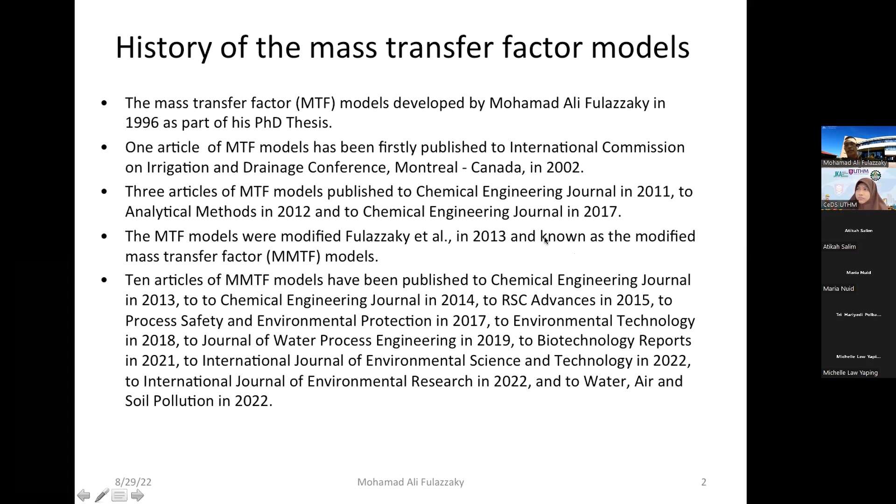Then we look at the development of the MTF model. The model is developed based on Fick's law of mass transfer. You can see here we have liquid, then the film zone, then the pores, and then fixation. Mass transfer passes through three successive steps. The first is what we call film mass transfer, from bulk water to the film zone. This is because we have a driving force, the difference between C and C*.

Then pore diffusion. Pore diffusion is within the pore; the solute moves within the pore. And the third step is fixation, here, adsorbing onto the active site. Because fixation is very fast, we consider that adsorption is controlled by either film mass transfer, or external mass transfer, or pore diffusion, or internal mass transfer. Only these two steps are important to consider when we adsorb something from the liquid to the solid phase.

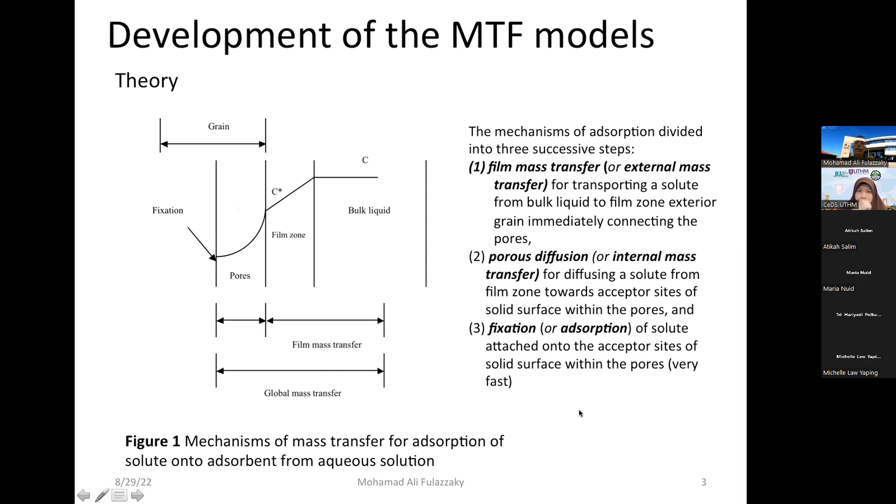And then you can see here how we develop the model.

First, please consider the continuous equation. The equation is written to set up a specific case. There are 2 cases: the first is at the level of elementary volume in case of continuous medium, and the second is at the level of system or part of system in different conditions of functioning. Our case is case 2, not 1.

And then we can look regarding the microscopic balance, which is to develop the balance of elementary volume, dx, dy, and dz in space using the equation of diffusion according to Fick's law. This is very difficult to develop. We should have very strong mathematics to develop this, because how dx, dy, dz move up, down, pass through and go back and so on is very difficult.

And then to simplify that, we use the macroscopic balance. Macroscopic balance is to write the general equation of mass transfer interfacial gas-liquid, or in our case, liquid-solid, to the level of system or part of system for different functional conditions.

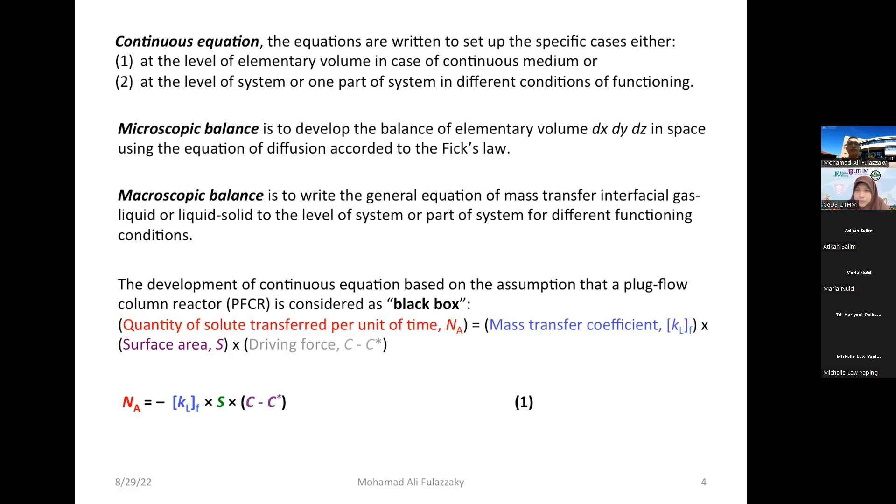Okay, and then look here, the model of flowing, the schematic of flow model, C and CS. And this C and C different, like that.

And then we can develop the model of mass balance: entrance equal departure plus absorbed. And then absorbed, we can define it by this, and then we can develop this model, and by some assumption, we have the model like that.

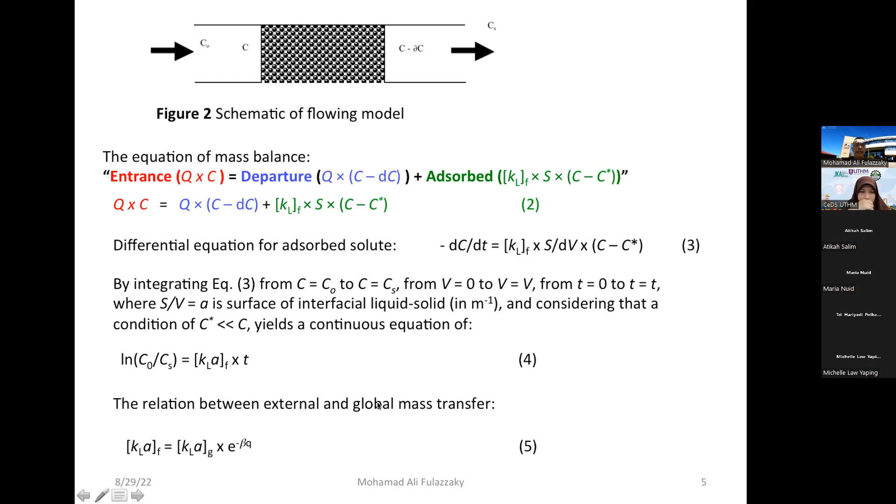And then we have the correlation between film mass transfer or external mass transfer and global mass transfer like that. And then we can write the equation like that. This is what we call the mass transfer factor model, or you can say the Fulazzaky equation, up to you.

To simplify that, we need to write it in the form of a linear equation. In linear equation, Q equals B, blah blah blah. And then B defined as this, blah blah blah.

And then you have a relationship between global, external film, and internal pore diffusion, like that.

So this equation, look here, before modified we write Q, but after modified, ln Q. This modified is an empirical equation because I didn't develop it theoretically, but only used the real data, and then we plot ln Q versus ln T, and we have a very, very good correlation for the model.

And this applicability of the model can be expanded, because when we replace Q with ln Q, and then ln Q versus ln T, we trace the curves.

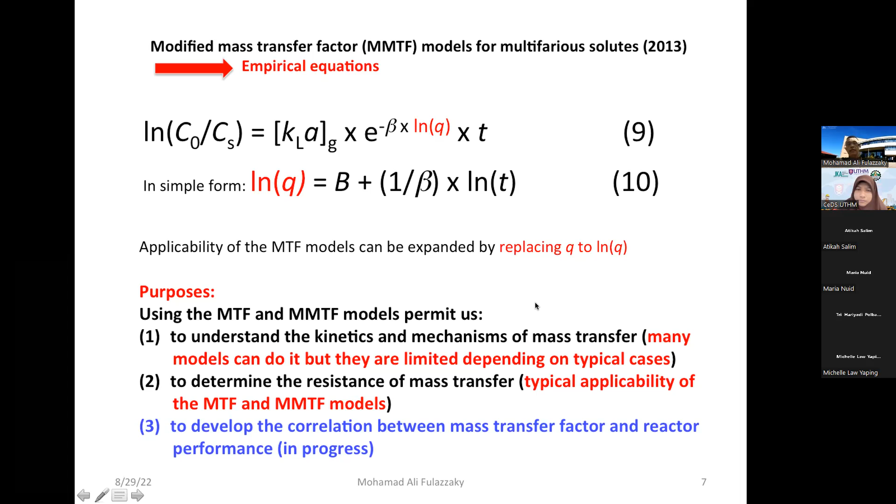Not like with Udin by using fungi, but this is in the reactors. I think we will be successful with that.

The basic knowledge of MTF and MMTF model - we can see here the difference between the two models. If we look at the nature and year of development, MTF is a theoretical equation developed in 1996, and MMTF model is an empirical model developed in 2013.

When we look at the curve plotting, for MTF model we plot Q versus ln T. But for MMTF model, we plot ln Q versus ln T.

The application of the MTF model is just applicable for single solute - it is a specific case, only for single solute. But for the MMTF model, we can use it for wastewater, river water, well water, and so on, because they contain multifarious solutes in water. So we can use that - this is the wide application of the model.

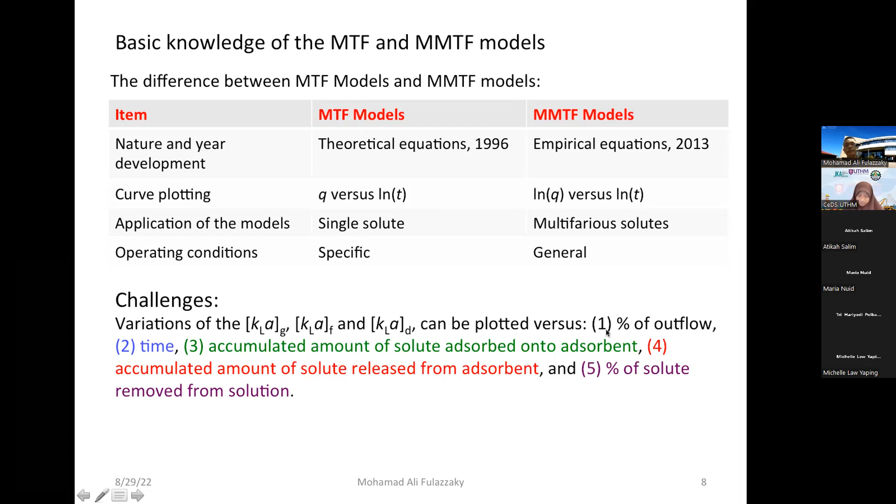And we can see also this model can be applied for many types of reactors. For example, here batch reactor for precipitation, we can use this. Sequencing batch reactor in case of Maria uses the sequencing batch reactor. Incubation reactor - the case of the paper I wrote with Udin - uses incubator reactor.

And also you can use hydrodynamic column, plug-flow column reactors like the case of Atikah, Hairul, and packed-bed column reactor in the case of Shakila. It's many reactors we can use.

Other reactors you can use also, but the principle is you should have accumulated amount over time. This is the key thing you should remember in your mind - you should have accumulated amount of solutes over time.

The use of MTF and MMTF models could be useful to study the mechanism and kinetic of adsorption, biosorption, desorption, precipitation, decolorization. But I don't have a case regarding the desorption. Maybe you can use this for your research - then you will have good novelty for that, because we haven't explained the case of desorption with this model.

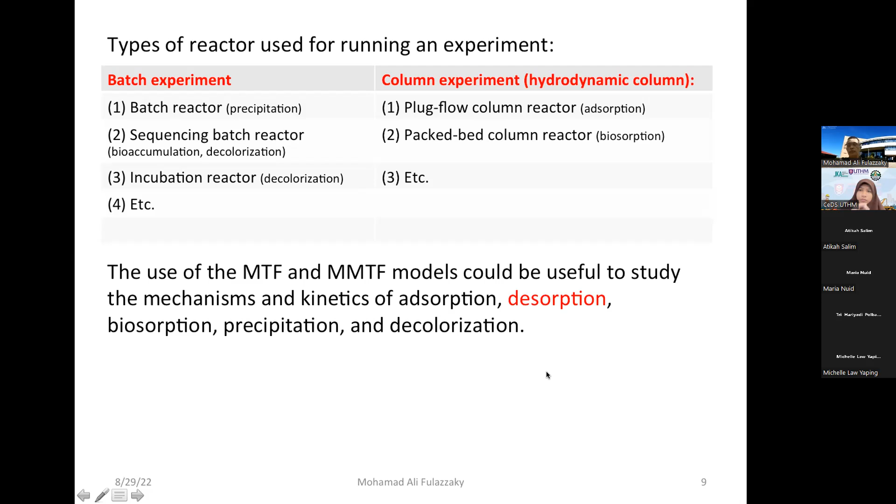If you see the implementation of MTF and MMTF model for different reactors - for example hydrodynamic reactors, we have published 6 articles this year; packed-bed reactor, 1 article this year; sequencing batch reactor, we have published 3 articles; batch reactor, 1 article this year; and incubation reactors, 1 article. These are some statistics you have.

What we want to tell you is that the interest of readers for this model is more than other of my publications, because citation of this model is higher compared with other publications.

These some articles we have published are all published in Q1. More in Q1, but we have also published Q2 and Q3 in WOS, about 5%. Maybe in Scopus almost all Q1, but only 2 in Q2. That means this model is very interesting if you want to publish your article using this model, because we have published in high quality journals - it's Q1 recorded in WOS, that means it's a very good journal.

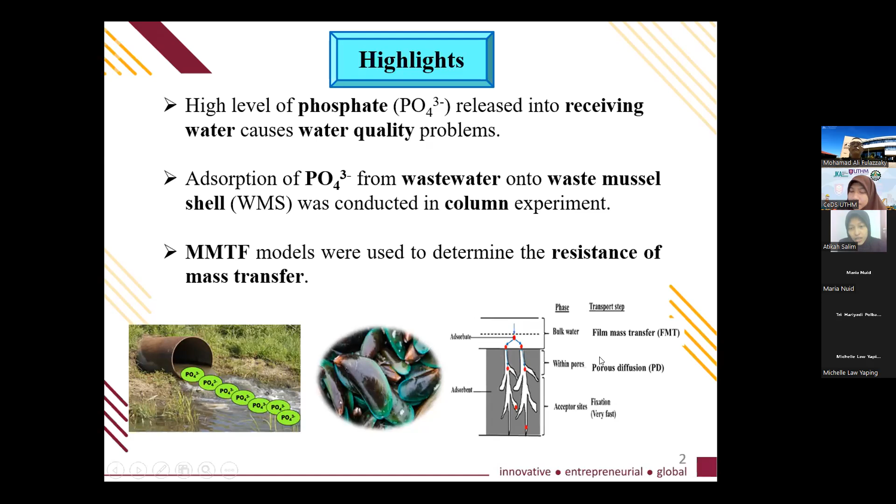In this work, the adsorption of phosphate from wastewater onto waste mussel shell was conducted in a column experiment. The MMTF models were used to determine the resistance of mass transfer, which is dependent on either film mass transfer, FMT, or pore diffusion, PD.

The results verified that the efficiency of phosphate removal from wastewater by the hybrid plug flow column reactor, HPFCR, reached 96%. The phosphate concentration of 0.26 milligrams per liter was detected in the treated wastewater, which can convincingly meet the international effluent standard.

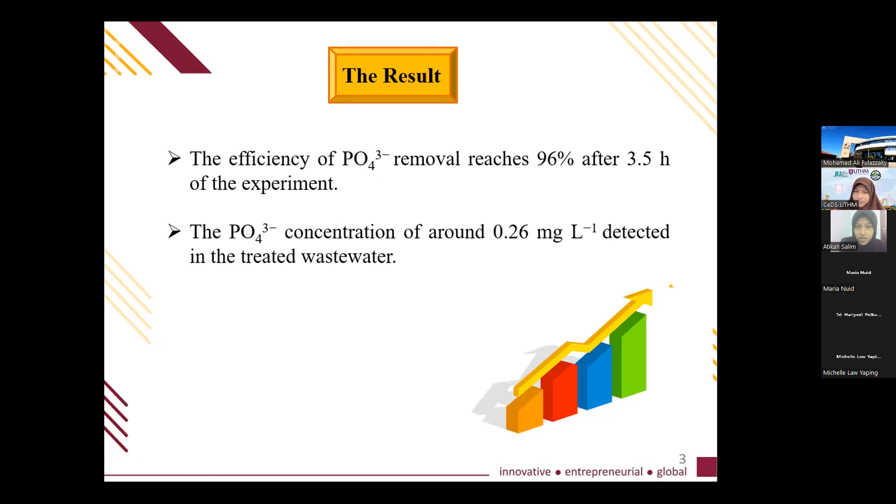Based on the curves in Figure 8B and 8C, the values of KLF and KLD against phosphate breakthrough can be used to determine the resistance of mass transfer, which is dependent on film mass transfer or pore diffusion. KLF is the film mass transfer, FMT, factor, while KLD is the pore diffusion, PD, factor.

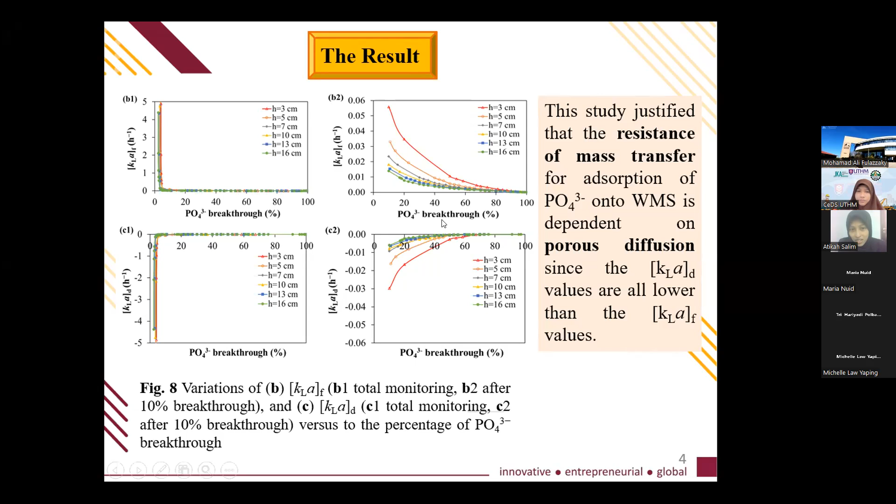The KLD values shown in Figure 8C2 are all lower than the KLF values shown in Figure 8B2, with increasing phosphate breakthrough. Therefore, this study justified that the resistance of mass transfer for adsorption of phosphate onto waste mussel shell is dependent on pore diffusion.

In the future, the MMTF models can be used to describe the adsorption of phosphate from wastewater or contaminated water by various natural materials such as egg, oyster, cockle, and crab shells.

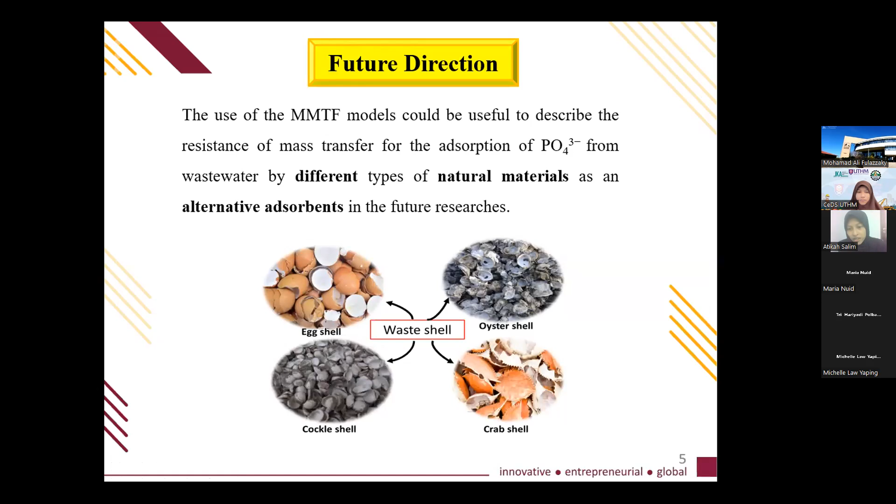This study produced the waste mussel shell (WMS) adsorbent and the hybrid plug flow column reactor (HPFCR) treatment system for removing phosphate. One article with impact factor 2.984 and 2 book chapters. We hope that this HPFCR treatment system can be expanded towards real applications to help improve water quality, especially for our people, our community, our state, and our country.

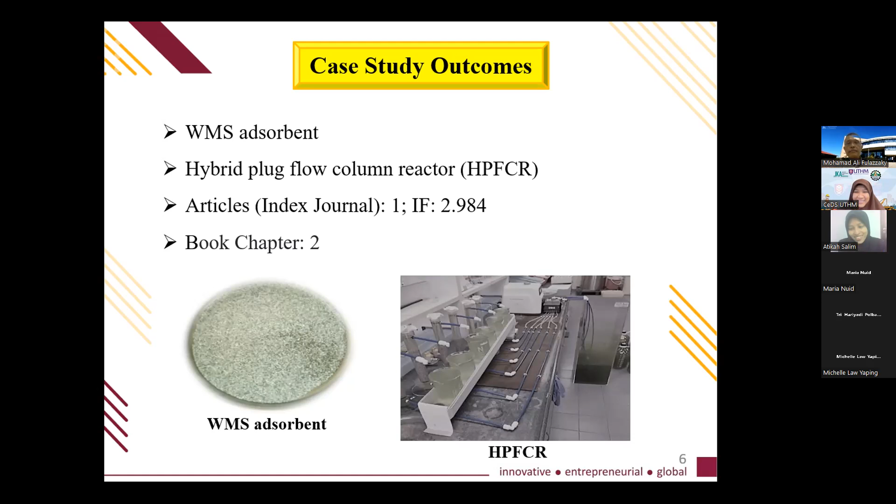Ladies and gentlemen, in 2022, Prof. Ali and Dr. Atikah have published 3 manuscripts regarding this application of modeling. Is it correct, Dr. Atikah? This year?

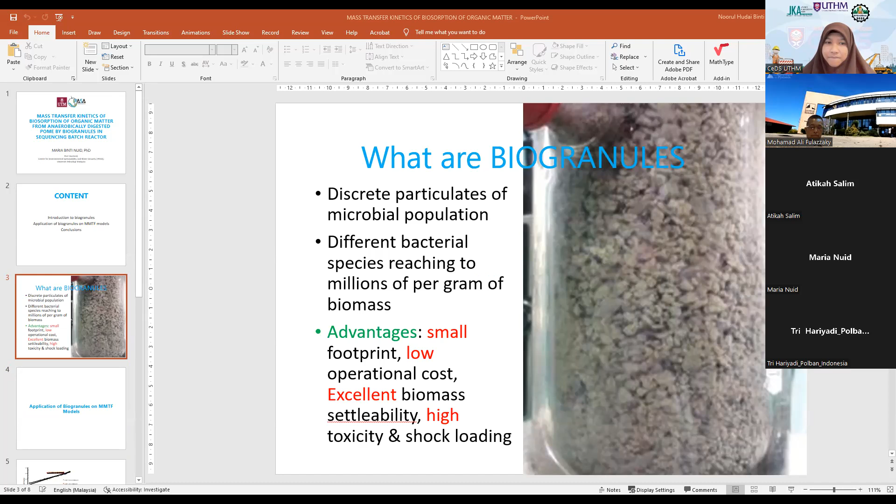Why use the MMTF model? The purpose of this study was to use the MMTF model to assess the biosorption behavior of organic matter, or total and soluble COD, from the anaerobically digested POME before and after the addition of Serratia marcescens SA30, or SMSA30, strain into the biogranule system. The aim is to understand the wide applicability of this model and thus provide valuable insight into the biomass accumulation and biogranulation process.

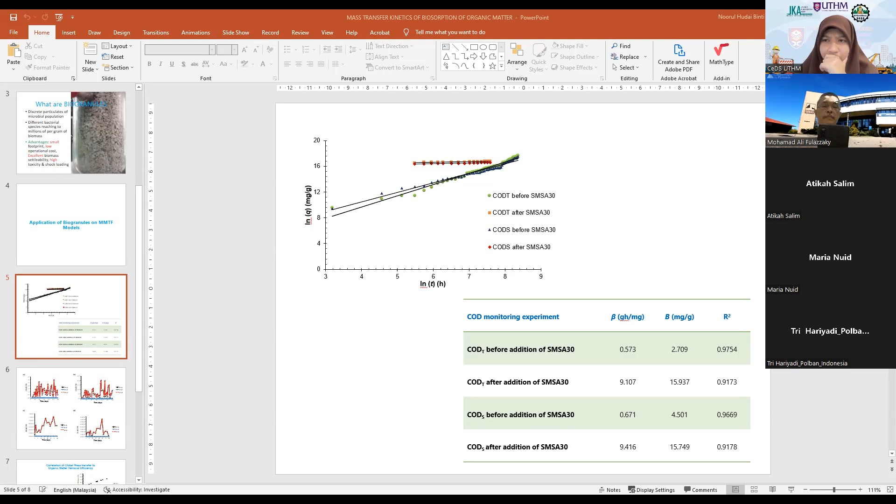This indicates that the parameters β and B can be used to describe the kinetics and mechanism of the total and soluble COD. From the graph, the values of B and β increased after the addition of SMSA30 strain into the biogranular system. Next.

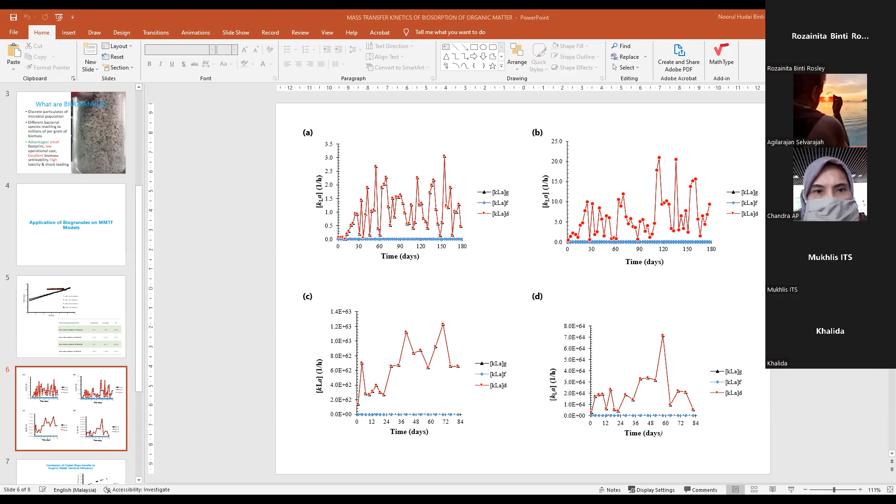The result indicates that the resistance of mass transfer is actually dependent on and controlled by the external mass transfer, represented by KLaF for transport of substrate from the bulk water to extracellular polymeric substances. For EMT, when a liquid flows through a biogranule, there exists a region near the biogranule surface where the liquid velocity is very low, giving rise to a near-stagnant film of liquid, which is of maximum resistance to transfer of substrate to the biogranule surface.

Okay, next, the figure shows the correlation of global mass transfer to organic matter removal efficiency. This graph shows that the performance of the biogranule system actually increases logarithmically with increasing global mass transfer rate.

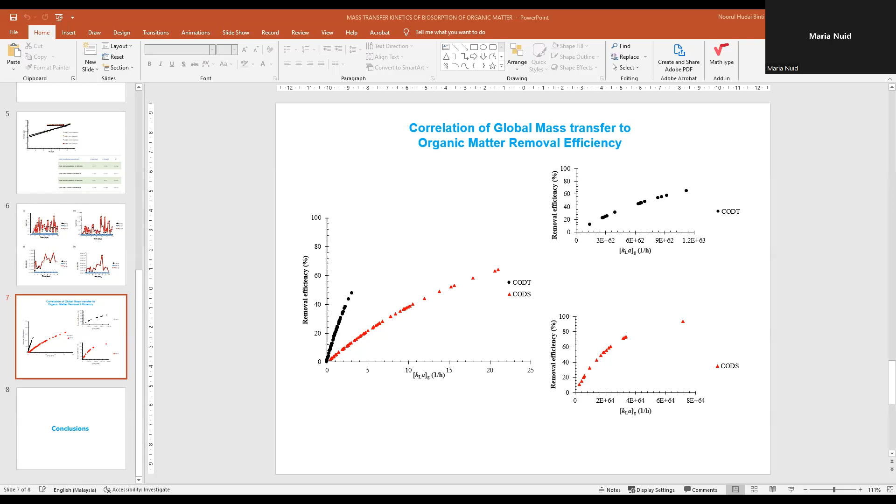Next, the last is the conclusion from my study. The result of the MMTF model actually shows that the total and soluble COD biosorption by biogranule in the SBR system is controlled by resistance of external mass transfer, EMT. And also, this study verified that the removal performance of the biogranular system treatment increases when the GMT, global mass transfer rate, increases.

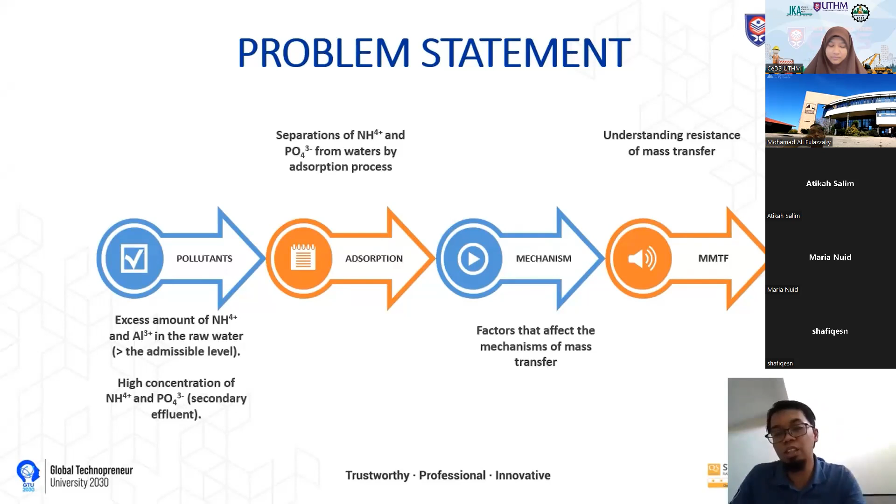Okay, the objectives in this case study. The first is to hypothesize and develop the modified mass transfer model, as I mentioned previously. The first mass transfer model applies to the single solute, but in this study, we try to use multiple, or various, solutes in the water. And then the second objective is to justify.

Okay, to justify the validation of the developed modified mass transfer factor to determine the kinetic and adsorption, and verify the application of the empirical model and the modified mass transfer factor model. But in this session, I just want to share about the mass transfer model, the adsorption kinetic and the other empirical models.

Maybe all of you can contact me if you want further information or knowledge about the kinetic isotherm of the other models. But in this session, we just focus on the mass transfer factor model. Okay.

Okay, this is the setup, the experimental setup for the first objective of the study. In this study case, we conduct it to understand, or to develop, the modified mass transfer factor model. This is the description of the reactor we set up: it consists of the column, peristaltic pump, and then a certain water storage, and then here is the main characteristic.

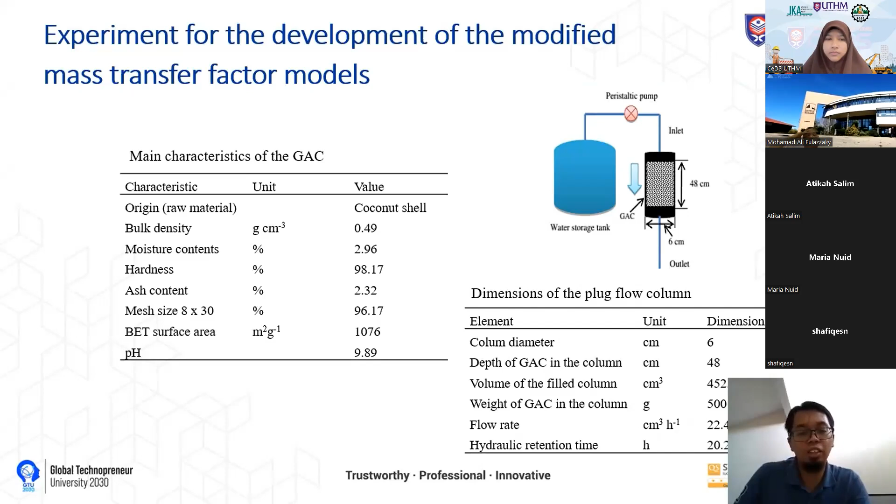And the second setup is to validate the application of the modified mass transfer factor model, and then we test again the modified model. First we developed it by using the two solutes, consisting of ammonia and aluminum, and we successfully developed the modified mass transfer factor model.

And then in the second study we use the modified mass transfer factor model and try to use it for other adsorbents, such as laterite, zeolite, and we still maintain to use granular activated carbon, but with different characteristics of the granular activated carbon.

And the second study we set up using the wastewater treatment plant effluent. The first study we used raw water; the second one we use the complex constitution of the water. So this is the characteristic of the sewerage treatment plant. We analyze certain pollutant parameters such as COD, suspended solid, turbidity, DO, pH, phosphate, ammonia, chloride, sulfate, and conductivity.

And here is the dimension of this one, we call it the hybrid plug flow column reactor, because it consists of two systems: filtration, and after the filtration we proceed to the adsorption process. Why do we put in the filtration? Because we use the wastewater treatment plant effluent, it still has certain suspended solids and others that can affect the performance of the adsorption to remove ammonia and phosphate. So we need the secondary treatment before we proceed to the adsorption process.

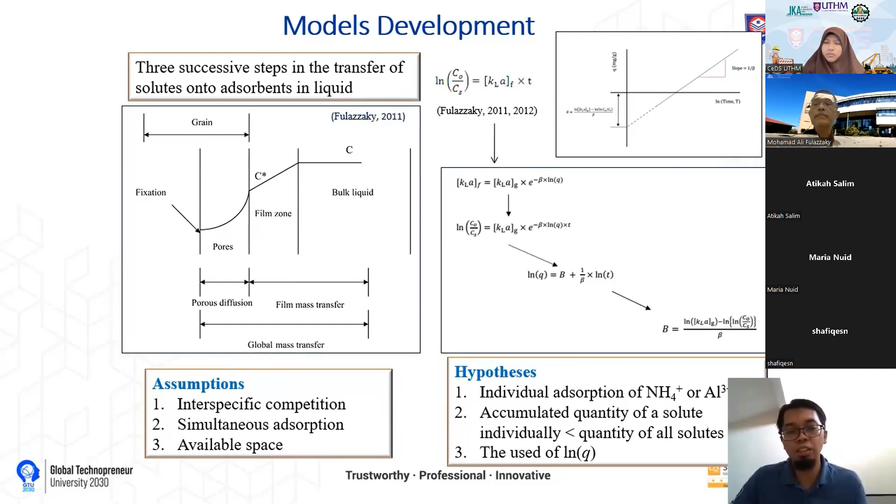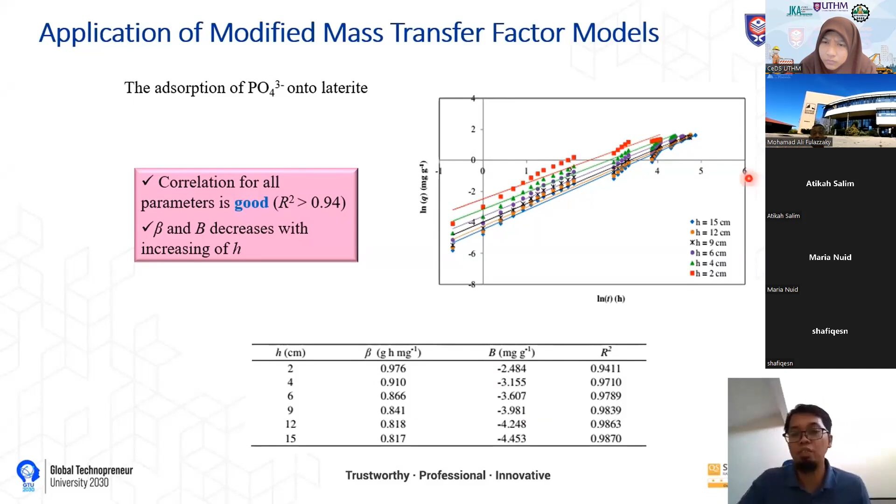So based on this model, the modified mass transfer factor model, we can understand the affinity between adsorbent, and also we can describe what happened in the adsorption process, what happened during the mass transfer, and what is the factor, the constant of the driving force.

This is the explanation for the global. As I mentioned earlier, global is the summation of the film and pore diffusion. We have the trend: it starts quick and then suddenly decreases, similar to the film and pore diffusion. From this one we can find that the lowest value, negative value, occurs at the pore diffusion. That means the resistance of mass transfer is dependent on the porous diffusion. That means the solute, the ion of the phosphate, favors attaching on the surface, on the film of the adsorbent, and it is difficult to penetrate into the porous diffusion.

So this one is for the ammonia onto the zeolite. They have the same trend, because they relate to the mass transfer. Mass transfer plays around with the concentration and also the number of the active sites. So they show the same trend of the beta and the same trend of the B, the same trend of the affinity, higher at the 2 cm and lowest at the 15 cm, and also the beta will decrease with the height.

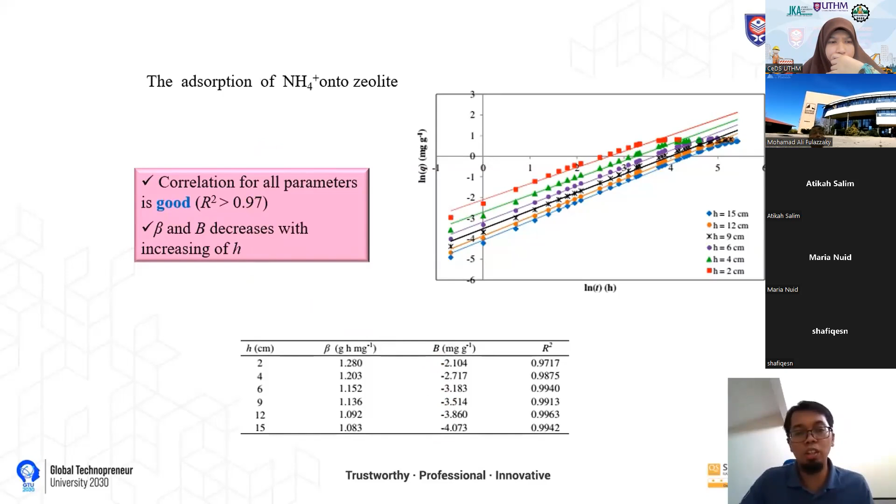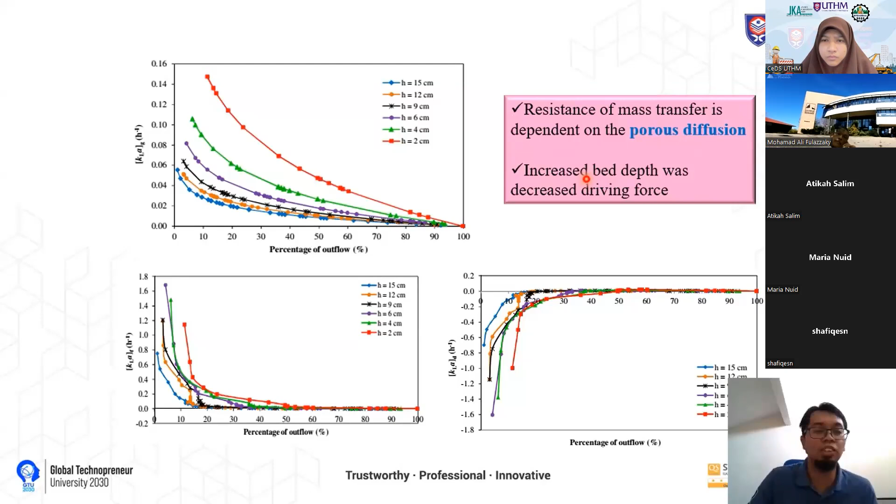So based on the application of the ammonia onto zeolite, this study has the same trend as the adsorption of the phosphate onto the laterite. For the trend, they are slightly different in the value of the resistance, but the same thing happens: the resistance of mass transfer is dependent on the porous diffusion. So we can find that increasing the bed depth decreases the driving force. The value will be decreased because of the difference of the concentration from the bulk solute to the film solute.

The application of the modified mass transfer model using the laterite, zeolite, and the granular activated carbon shows the resistance of mass transfer depends on the porous diffusion. This finding gives you ideas. So when you study the adsorption and you find the resistance of the mass transfer occurs in the pore diffusion, that means when you want to modify the adsorbent, you can focus on how to increase the pore, because the finding of this study is that the solute or ion of the phosphate or ammonia is difficult to enter into the pore. So for further study, we need to find other methods to increase the pore in this adsorbent.

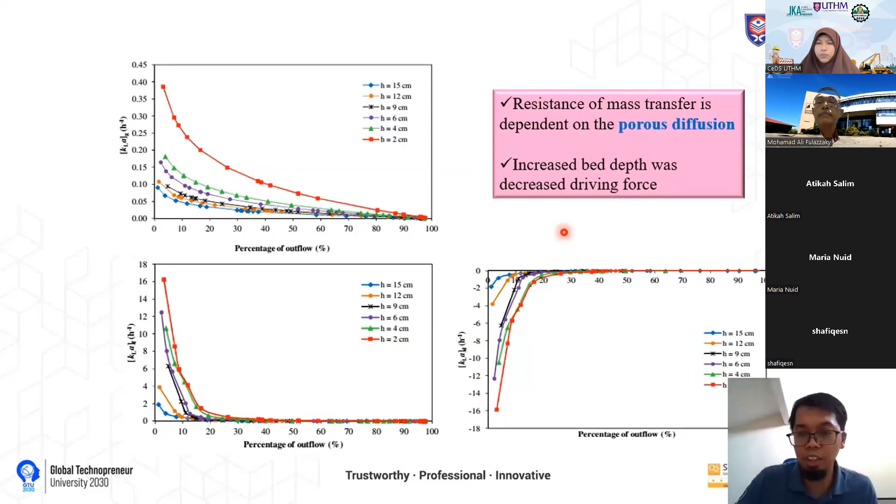And then the conclusion: we already verified that the modified mass transfer model can describe the global, external, and internal, that means the film and the pore diffusion, and the resistance of mass transfer for adsorptions of one or more solutes present in surface water and effluent wastewater, and contributes to engineering improved adsorption capacity. As I mentioned earlier, when you find the solute is quite difficult to penetrate the pore, you can modify the porous characteristics, the properties of the porosity of the adsorbent.